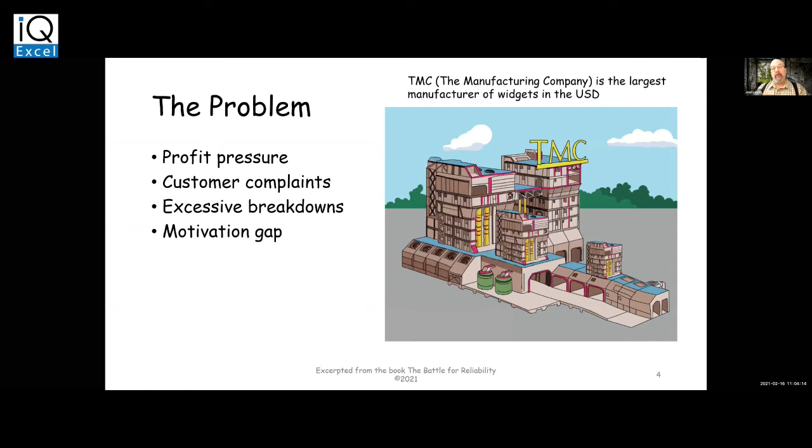So the problem is we have this manufacturing company, which makes widgets, of course. And the problem is that there's profit pressure and customer complaints, excessive breakdowns, and there's a motivation gap within the teams that are actually making this stuff. So the board meets and they decide to hand the problem off to a new guy. This is how some people get to have experiences. They get dropped into these kind of places.

So the new guy meets with his team, and we have a sales manager, a maintenance manager, engineering, IT, finance, and operations managers, and asks them, this is a mess. What can we do? And I'd like to remind everyone that in the maintenance world, we're in a battle against entropy, which is the gradual decline into disorder. And we will always lose that battle eventually. What we're trying to do is to win the battle long enough to get the value out of the rail car or the refinery.

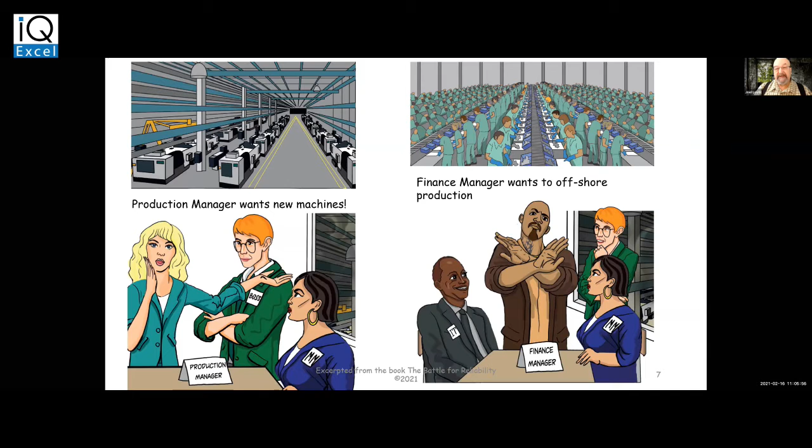So we go to each of these people. Each person in your company has a point of view about what the issue is and what the solution is. The production manager wants new machinery. The finance manager feels that everything should be offshored, and that would be the best solution to this problem. The sales manager wants a bigger warehouse and more

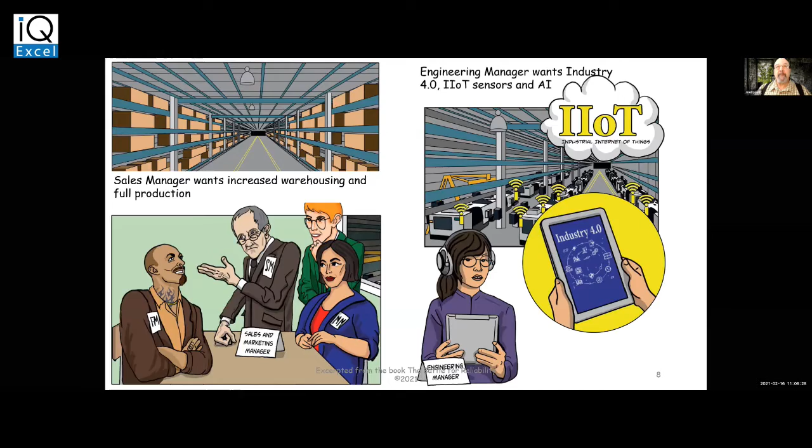production. The engineering manager wants the coolest IIoT, industrial Internet of Things, Industry 4.0 and sensors and everything else so that she can tell everything that's going on inside the asset. The IT manager wants a new CMMS and make it talk to everything else. And so the maintenance manager is sitting there and listening to all this. And the plant manager asks, what's your opinion?

So the maintenance manager says that all of these solutions are good solutions. The problem is time and investment. New machines, offshoring, new buildings, Industry 4.0, new CMMSs, all good solutions, all proven, but they take years and hundreds of thousands of dollars. So what she wants to do is a very low tech solution. She wants fast results with TLC, where we're going to attack the enemies of reliability directly.

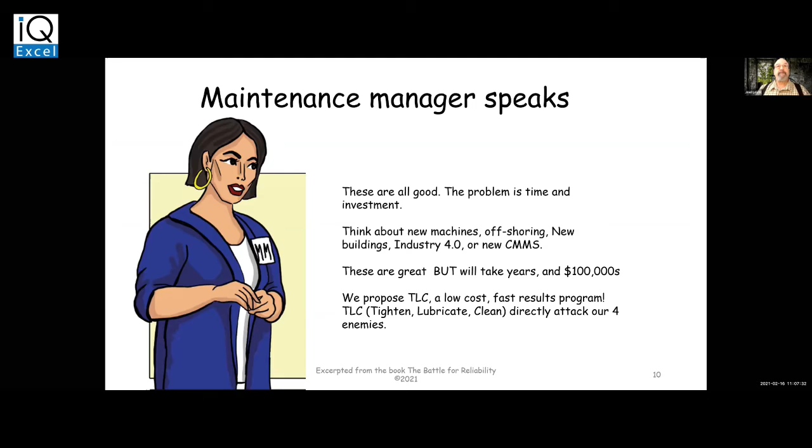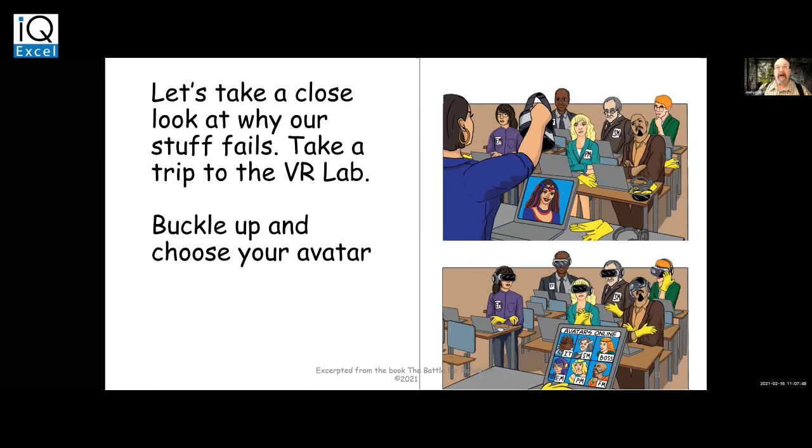So I invented a VR lab so I could show you what's going on. So everybody's going to now suit up and get their avatars and go into the lab. We're now going into virtual reality. So in the upper left, we see this is a gearbox that's been giving us problems, and we enlarge the gearbox so it's now bigger than life. And we can now start to see, in the individual bearings, there's breakdowns.

You can see that the clearance between the ball and the race is way smaller than a typical piece of dirt. So the dirt clumps up in there and creates heat, and if the dirt is hard, like aluminum oxide, it's extremely hard, so the ball can't crush it. What it'll do is it'll jump over it. So it creates, as you can see in the right side on the bottom, vibration, thumping, and so we now have heat being created, vibration being created, and dirt being created.

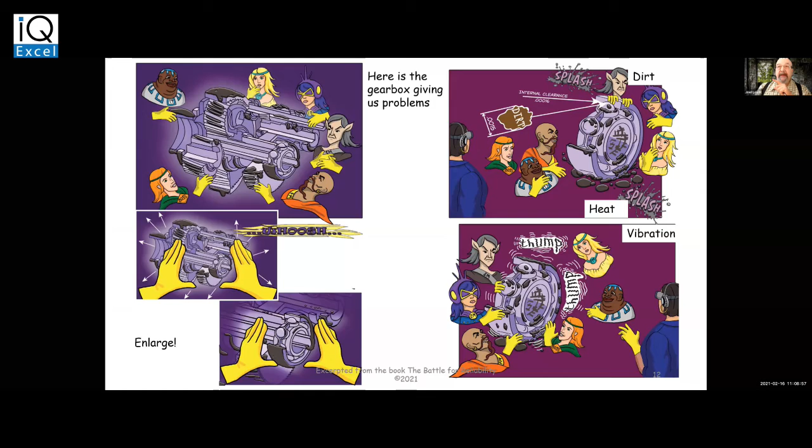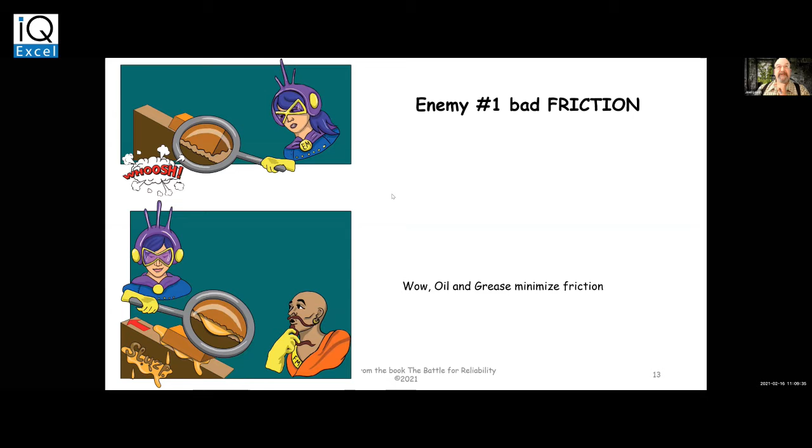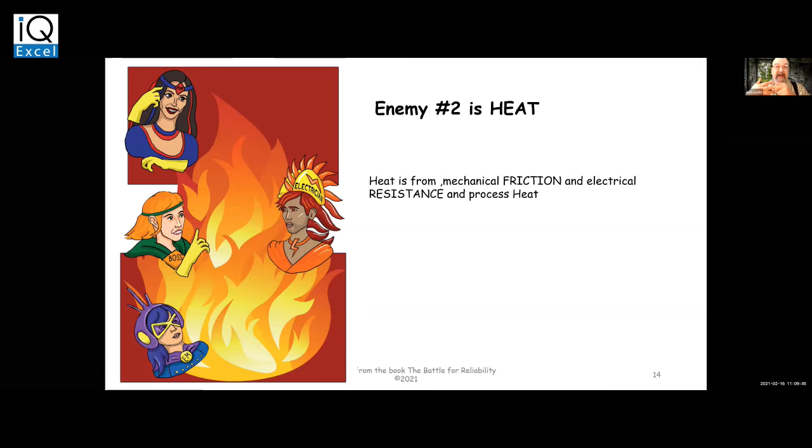So enemy number one is bad friction. And when you enlarge something, you can see that what looks like a smooth surface is actually a rough surface. And when that rubs directly against another surface, it creates dirt, like sandpaper would create dirt, and heat. And it takes a lot of energy to move it. So we put in oil and grease to minimize the friction. So bad friction is enemy number one. Enemy number two is heat, and heat is from bad friction, from electrical resistance, and from process heat.

Enemy number three is looseness, and this is, as opposed to bad friction, this is good friction. It locks things together. Remember, the things are not smooth, they're rough. So when you clamp them, they stick together, and the things can't move in relation to each other. So that locks things together. Looseness, which is enemy number three, allows things to move. And in electrical connections, it allows corrosion to get between the contact and the wire. And, as you know, that causes heat and possibly fire.

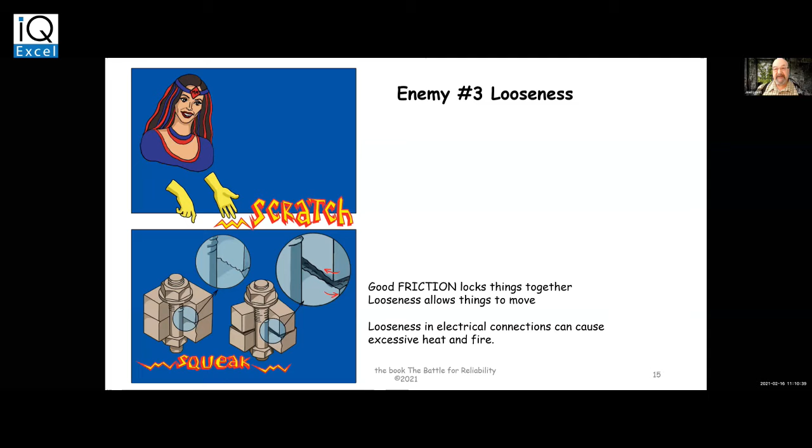The fourth one is dirt. As we talked about, dirt makes heat, and dirt also acts as an insulator. It also obscures what you're looking at, so you can't really see it. It makes repairs unsafe. It lowers the feeling of ownership, and it makes repairing machines undesirable for maintenance, and cleaning is undesirable for operations. So those are our four enemies.

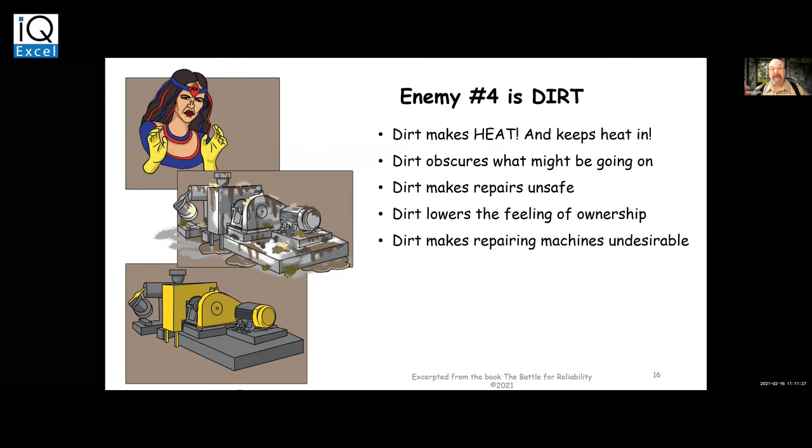There's lots of reasons why our equipment fails, but when you boil it down, you get to one of these four enemies many times. So here we're going to unleash the Kraken, the powerful minds of the team, and we're going to get small teams of maintenance, operations, and other interested parties to work together. And there's going to be three groups. One of them is going to work on tightening, one on lubrication, and one on cleaning.

And we're looking for micro projects. These are things that people can do themselves. They don't need huge amounts of money or super long lead times. These can be done very quickly. So the micro project has simple rules. One is it should be really, really inexpensive to do. It should use the inventory, tools, and expertise that's already there. It should have a high probability of success and be easy.

So the teams met, and they made 6 little projects to try to move the needle on reliability by addressing the 4 enemies. So the tightening group: when you go through and check the torque on bolts in a factory, a machine, a truck, or a train, you find, from research, that a lot of them are not torqued correctly. A lot of them are loose, maybe 20%. Some of them are too tight.

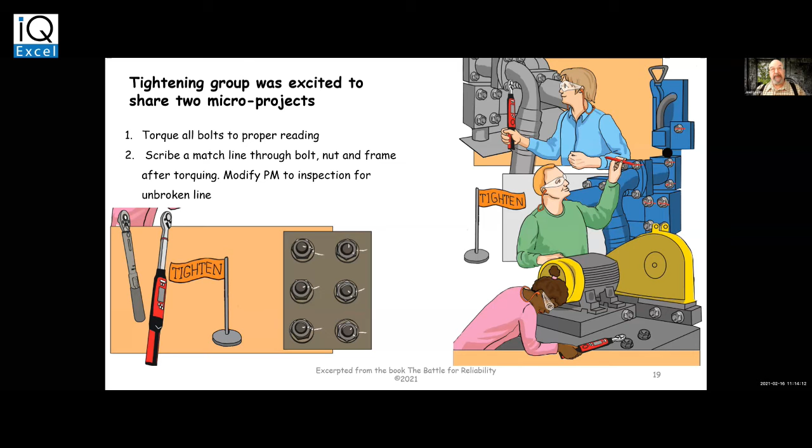Now the lubrication folks had two little projects also. This is really interesting. They found that the oil drums were stored outside. When the drum is hot during the day, everything inside of it expands and a little bit of air gets puffed out of the bunghole. And when it gets cooler, the oil contracts and sucks in anything that's right around the bunghole. So you get this breathing thing, and particularly where there's a gradient in temperature between daytime and nighttime, it literally draws in contamination.

And we found that new oil that was left outside, compared to the SAE allowable contamination, was 15 or 20 times more contaminated than it should have been. So they moved the drums inside immediately. They then tested everything and found that even some of the stuff inside was contaminated. So they bought a filter cart, like a kidney filter, a bypass filter, and filtered all the oil before putting it into their machinery. If we think back to the virtual reality, you remember all that dirt in the oil. Well, we're going to start seeing where that dirt comes from.

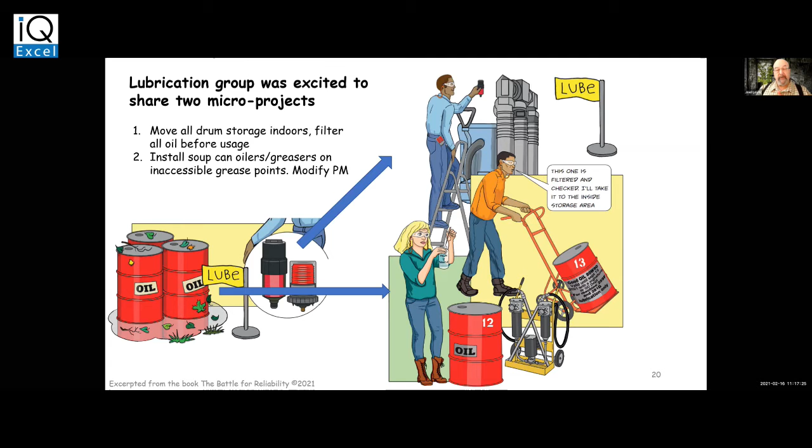So they put in some of those oilers and added them to the PM task list to make sure they were looking at them at a cadence that would catch them when they ran out or had other problems. So here we have 4 little projects, 2 from the tightening people, 2 from the oil people. All of them are going to directly impact the failure modes that are most common.

And the last one is also amazingly simple. They called it the clean machine, and they set out workstations for cleaning zerk fittings, oil cups and tanks, the tops, where you just clean it before you do the lubrication and clean it afterwards. And that was the project. And people were actually using the materials. They publicized it and they made banners up and stuff.

But it was just the simple thing of wiping a fitting off before you put lubricant in it. Any mechanic in the old days would know that, but now the pressure is on to get production out. So some of that's fallen by the wayside.

The second thing was that one of the best solutions to dirt is to catch it where it is created. In other words, if you can figure out where the dirt is coming from, if you can catch it there, it's much less expensive to deal with it there than it is inside the machine and the bearings and everything else.

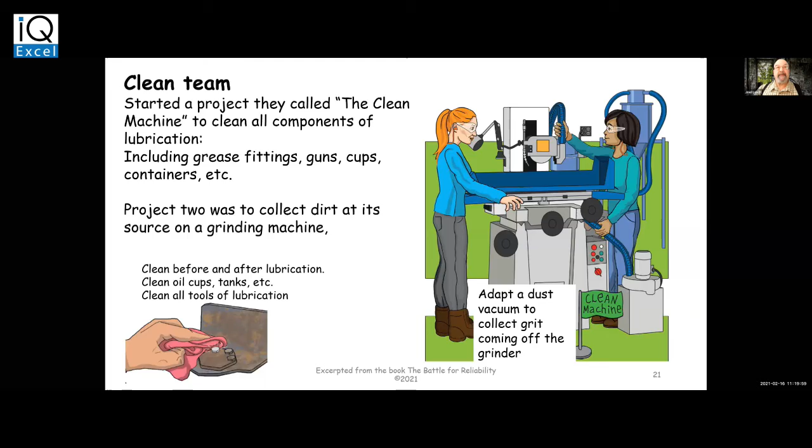Now, the toughest part of this, obviously, is going to be sustaining the program. The model that I'm using here is what's called the ProSci model, which is when you're making a change in an organization, you want to make sure everybody's aware of what you're doing and why you're doing it. The second thing is to create a desire on the part of other people, that they're interested in this and they see something for themselves in what you're doing. So they see that it'll make it cleaner or it'll be better to work there.

We then have to give them knowledge, and we have to give them all the tools that they need, the access, the cleaning tools, the space for the drums inside. And then finally, we have to keep reinforcing the messages. So that's how we go about sustaining a change in an organization. They call it their ADKAR model.

So I want to thank you very much for this short talk. This is all about victory over entropy. So I want to thank you for listening. And this is a comic book. These pictures are from the comic book, to try to communicate this in a fun way to some of the younger people. So thank you very much.